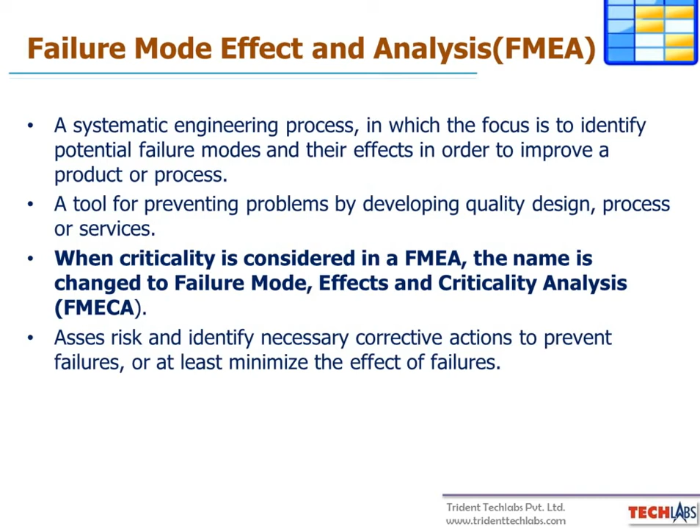So first of all, we want to see the history. What is the history for this FMEA analysis? In the mid-60s, in the aerospace industry, companies like Boeing or other aerospace companies, satellite companies, started using this FMEA analysis. Majorly because safety and risk is involved there, they will use this FMEA analysis. Majorly in India or all over the world, defense companies and aerospace companies are using this analysis.

So next industry is the chemical industry, because there also safety is required, risk also involved. In chemical companies there are a lot of processes. The chemical or any material has to undergo several processes. So how to improve, how to minimize the effects or failures, we can do through this methodology.

Afterwards, if you see the automotive industry, they adapted this FMEA technique. It's able to do a lot of improvements for them, because if you are doing any automobile company or electronics company, first they will invent one system. For example, if I take one missile, first they will design it to go and hit the target for 10 kilometers. The next system maybe it will go for more than 25 kilometers or something, because for the next generation or newer version, they want to overcome the drawbacks they faced in the previous system, to avoid those failures and improve their system quality. This method is very useful to do.

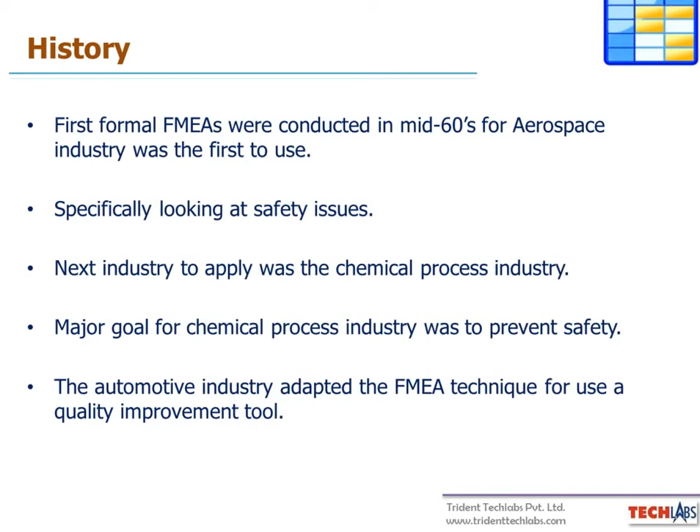So there are some simple terminologies in this approach: what is failure, what is the failure mode, what is the cause, and what is the effect. These kinds of terminologies are important. For example, I am saying the inability of the system is the failure.

So system means we can call it some PC, a personal computer, we can also call it a system. Whichever the designers are trying to make, that is the system. For example, if one system means there are so many other subsystems also will be there. If I am taking one computer as a system, inside that system there are so many subsystems, for example motherboard, hard disk, RAM - different types of subsystems are there. If anything is not working, we call it a failure.

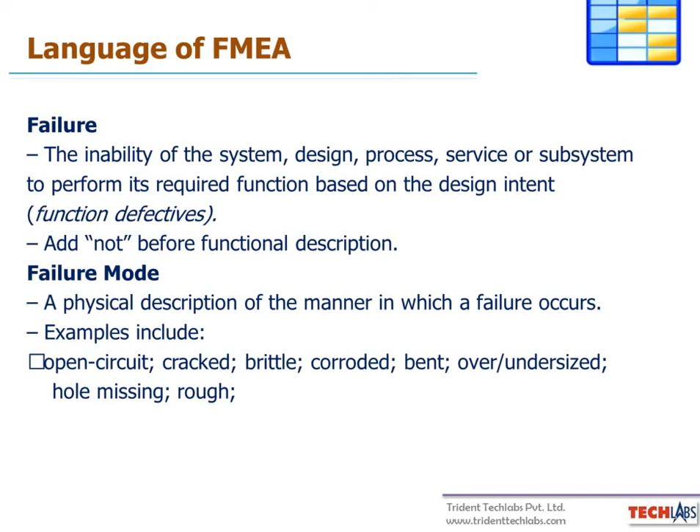So, failure mode - we should know what is the failure mode. Failure mode means a physical description of the manner in which a failure occurs. For example, if you take an electronic component like a resistor, there are two types of failures: one is open circuit, that is one type of failure, and short circuit, that is one more type of failure. So this is failure mode - open circuit failure mode or short circuit failure mode. Different types of failure modes are there. So that is one more terminology.

So what is the cause of failure? We should know which one is the cause of failure. So for some particular failure, what is the root cause, what is the origin of that particular failure? We should know the failure mechanism. If this resistor has failed, because of this resistor, power supply stops going to the system and the whole system is not performing - so this is root cause. We should know how the failure happens, why that particular item is not working, what is the reason for that particular failure. That is the root cause of the failure.

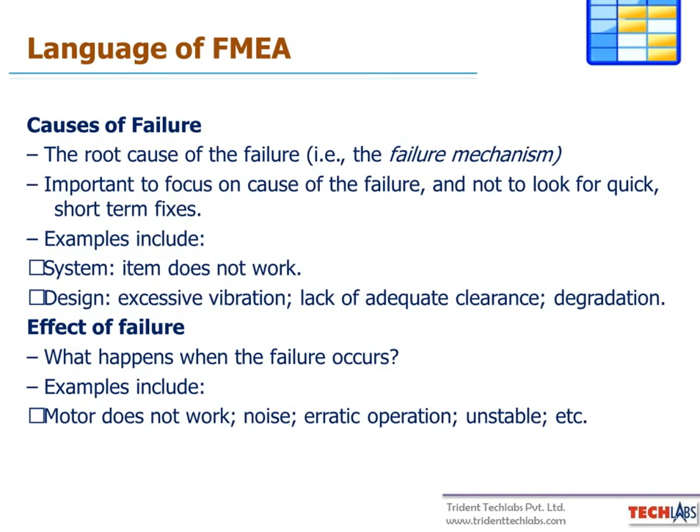Then effect - some failure has happened, then what will be the next effect? So if power supply has failed, my whole system is not working. That is the effect - my system is not working, or a particular motor, stepper motor, this is not working. Any kind of such effects we call effect of failure.

So what are the causes? Potential causes of failure - here are some more examples. Some poor soldering, if you are not doing it properly or at a particular heat, that is one kind of cause of failure. Or if you are over-stressing the components, if it is an electronic component, then we call that one cause of failure. So there are so many different causes for any failure.

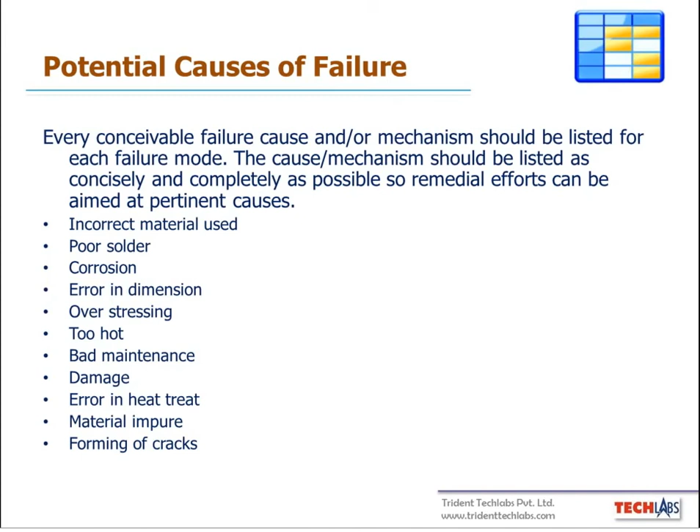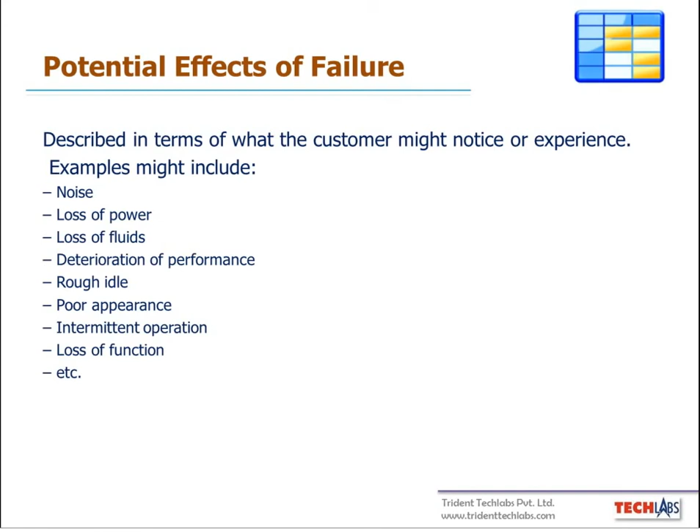So what about effects? Here are some more examples for the effects - loss of power, or any noise if it is coming, or loss of particular functionality. So there are so many different types of potential effects of failures. These are examples I have given - apart from that, so many other failures also exist in any system.

So there are levels. Item means any component - for example, a resistor or an integrated circuit like an IC or any processor. One item has different modes of failure - short circuit, open circuit, incorrect timing - different modes of failure exist. So for one mode of a particular failure, so many different causes also exist. One item having different types of modes, and one mode having different types of causes, and for each cause there will be some effect. So this is the level: item, under the item different modes, and under each mode different causes, and each and every cause having different effects.

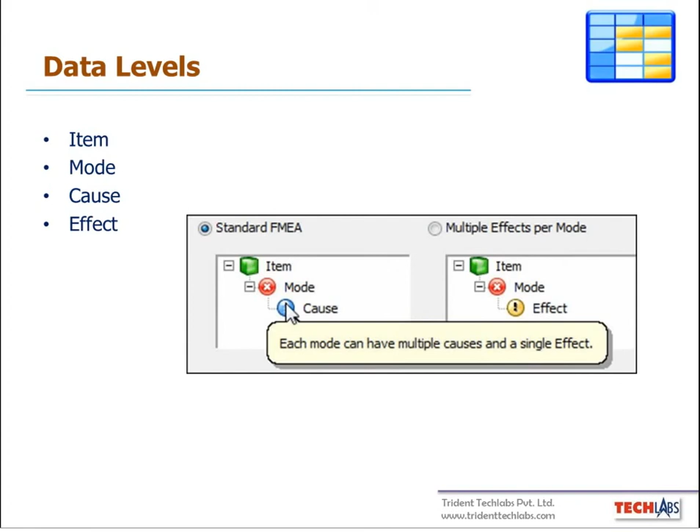So when doing any FMEA, you have to follow some standard, because already a path is there, already a road is there, so we have to follow that particular path. If it is an aerospace or defense project, you should use the MIL standard 1629. If it is an automotive industry, the AIAG method is there. If you are doing any non-automobile application, the SAE method is there. So different types of standards exist because the products are different, the end products are different - different products having different standards.

So first we will see the MIL standard - MIL standard 1629. This standard is given by the Department of Defense, US. They have made this standard. So since a pre-made standard already exists, it is better to follow that standard. And so many software tools have also incorporated this standard into their software, so the methodology and approach will be much easier to do this analysis.

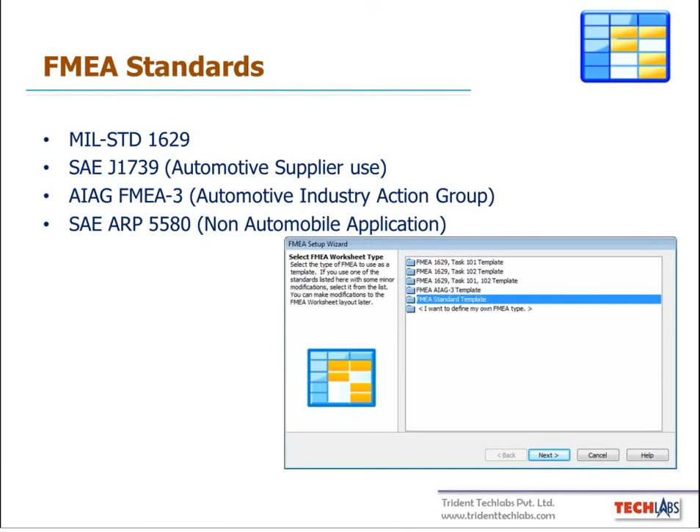In MIL standard 1629, there are different types of tasks. Task 101 is the failure mode FMEA task, 102 is the criticality analysis, 103 is for FMEA maintainability information, and 104 is damage mode and effect analysis - because each system has to undergo certain analysis. So for example, task 101 and 102 are the major tasks followed in this FMEA analysis.

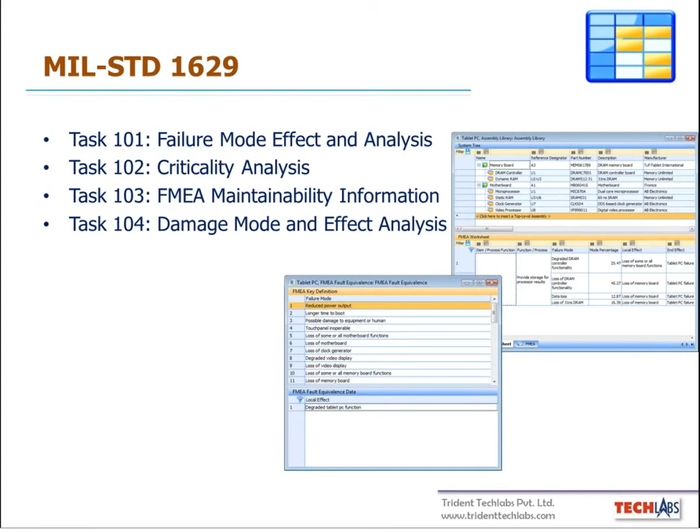There are different types of FMEAs. Three types are there: process FMEA, functional FMEA, and component level FMEA.

Process FMEA means if you are doing any electronic system, inside that system there are a lot of different components, PCBs are there. In that PCB, varieties of processors like processing unit, A to D converter, so many components are there. Each and every component we should handle in a different manner. For example, if you are making a PCB assembly, and you touch a processor with your bare hand, then there is a failure or some effects on the particular component. So how to handle those particular components, processors, how to handle them?

So like electronic, electrostatic protection, anything you have to use. These kind of guidelines you have to give to the assembly people, who are doing the PCB assembly. If they don't properly handle those particular components, it will affect the performance of the component, then it will affect the PCB level, then the whole system level. So these kind of processing details, you have to give as guidelines to whoever is handling those components. That is process FMEA.

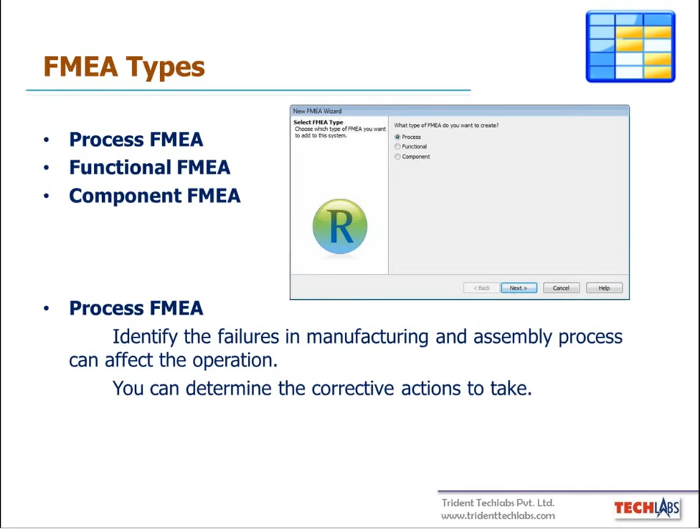Now if I say functional FMEA means, what are the functional level failures? One system is there, for example a laptop, what type of functional failures will come. For example, if the mouse is not working, that is one type of functional problem. If your motherboard is not working or your processor is not working, some particular functionality level, that is functional FMEA.

Functionality level means my display is not working, my keyboard is not operating, or my particular action is not taking place. My LED is not glowing, power LED is not glowing. These are different types of functional FMEA.

The same point of view, if I say component level FMEA. Component level FMEA is single point failure. My processor is not working, my LED is not glowing, this is a single point failure. If that particular component is not working, my whole system may not work, or my partial system may not work. These kind of problems will come. That is component level FMEA.

So we should know where we should use component level FMEA and where functional FMEA. For example, my system may be very small or very huge. For a small system, we should go with component level FMEA. If my system is very huge, more than 500 or 550 PCBs in one particular system, then there are lakhs of components. I can't speak at the component level, so I can speak only at the functional level, how my top level system is getting affected based on particular components or particular functional activity.

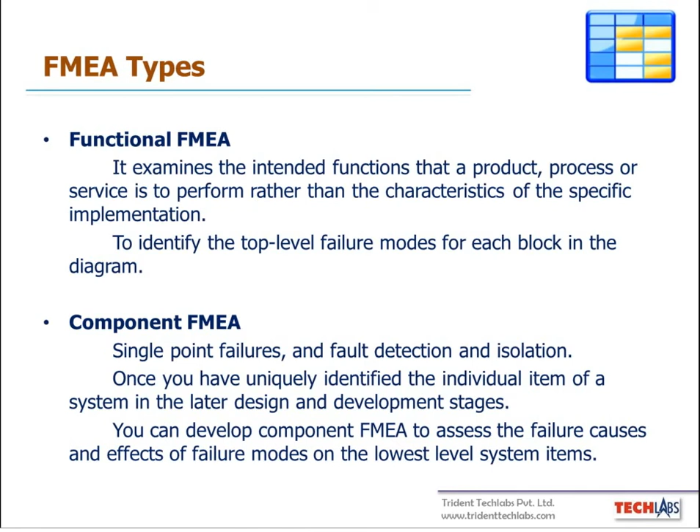More severity, the critical level is there, marginal level failure is there, then minor failure is there. Minor failure means we are doing some maintenance activity that is not in the regular plan, unconditional maintenance but not planned maintenance, that is minor level. Marginal level means some particular functionality only is not working. Critical level means some particular subsystem or part of the system is not functioning. So the designer should know which severity level this particular failure is.

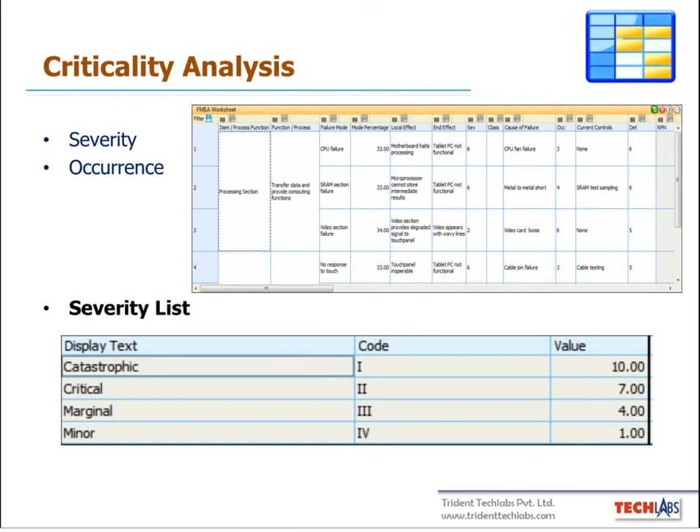So occurrence: what type of occurrence is happening. For example, it is happening very frequently, or it is a reasonable failure, or it is happening occasionally, or it is a remote-level failure, or extremely unlikely, where we never expect this kind of particular failure to come. So those kinds of failures, this is the occurrence list.

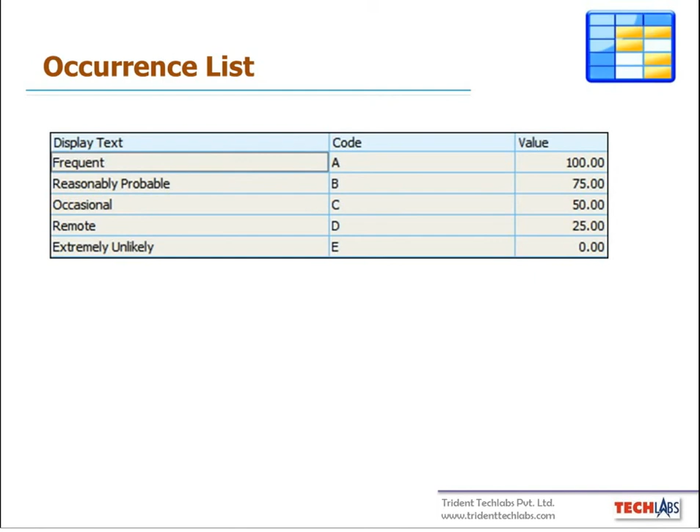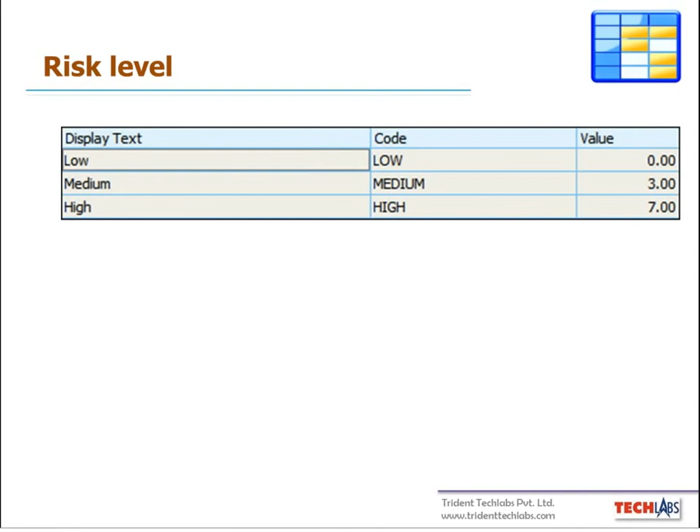So based upon the severity and the occurrence, we will decide the risk level: whether my system is at a high level risk, a low level risk, or a medium level risk. From that, we will do the criticality matrix. Based on the severity and occurrence, whether my system has a low level problem or a high level problem, we can define through the criticality matrix.

Because here, for each one, we have different types of values, and some values we have mentioned. According to these values, by multiplying these two, we can define the risk level, which risk level my system is in. That we can define through this criticality matrix. This is the FMEA MIL standard. Based on MIL standard 1629 we are doing this.

And here one more important thing is there: FMD. FMD 97 means failure mode mechanism distribution. FMD means that each and every component has different types of failures. Because a capacitor will have some typical types of failures only. Or a microprocessor, apart from some 5 to 6 failure modes, there won't be any other failure modes.

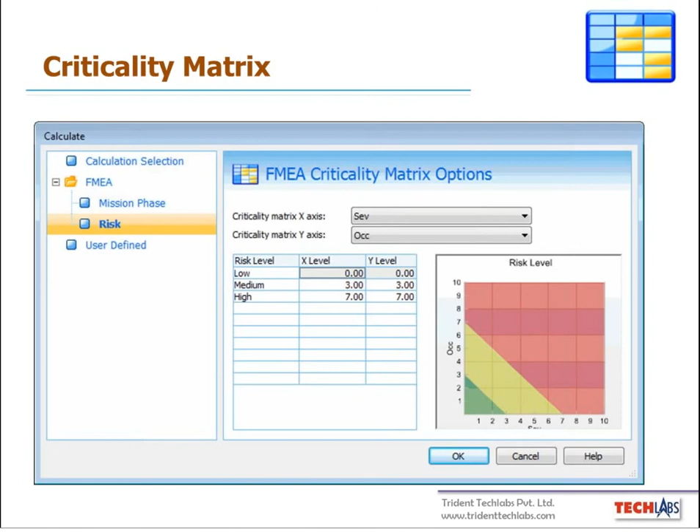So these kinds of failure modes for each and every component, diode, transistor, processor, not only electronic components but mechanical components also, are readily available. Directly for this failure mode, what is the chance of system failure, that we can define. So this is the qualitative analysis.

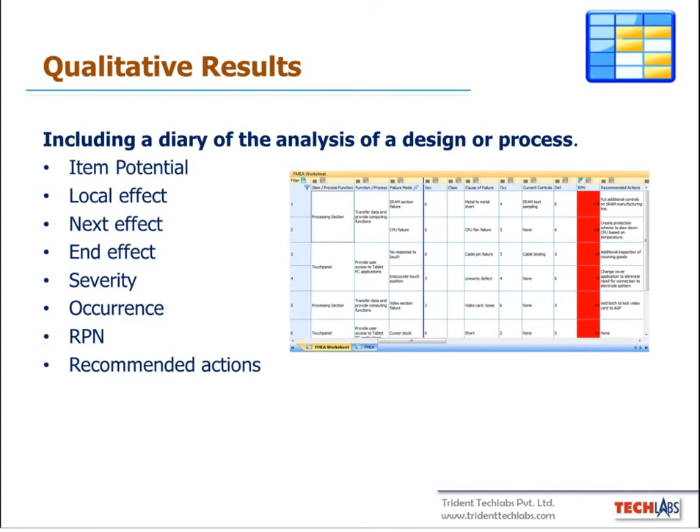Then the next method, which the automotive industry follows, is the RPN method. RPN is risk priority number. Based on what will be the local effect, the next effect, the end effect, and the severity and occurrence, we will define the RPN number. This method is the AIAG method, AIAG potential failure mode and effects analysis. This is for the automotive industry, and we can use it for electronics also.

We can use it, but whenever we do any FMEA analysis, the customer or the supplier who wants this FMEA will mention according to which standard you should do the FMEA analysis. So severity means there are different types of severities, each with a different ranking. Severity 10 means dangerously high: if it will injure your customer or a company employee, or cause system failure.

So there are different types of severity levels mentioned here. For example: extremely high, very high, moderate, low, very low, minor, very minor. From this ranking level, the designer can easily define how this particular component or particular failure is affecting the system. He can define it easily based on these severity rankings.

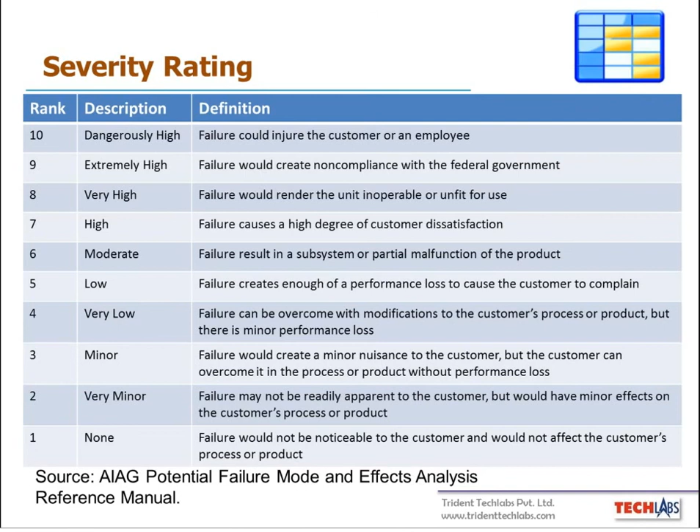The same way, occurrence is also there. Probability of failure very high means failure is almost inevitable. You can't identify what type of failure it is, so we give it the highest rank. Like this, high, moderate, low, very low are there. And possible failure rates. We should know what failure rate is. Failure rate basically means the frequency of failure.

A simple example: if you are buying any TV, like an LED TV or LCD TV, we will ask the warranty period, how long my system will work. They will give some 1 year or 2 year warranty. Your system may work more than 1 or 2 years, but at minimum the system will never fail within this particular period of time. So based on this failure rate only, they define the warranty period.

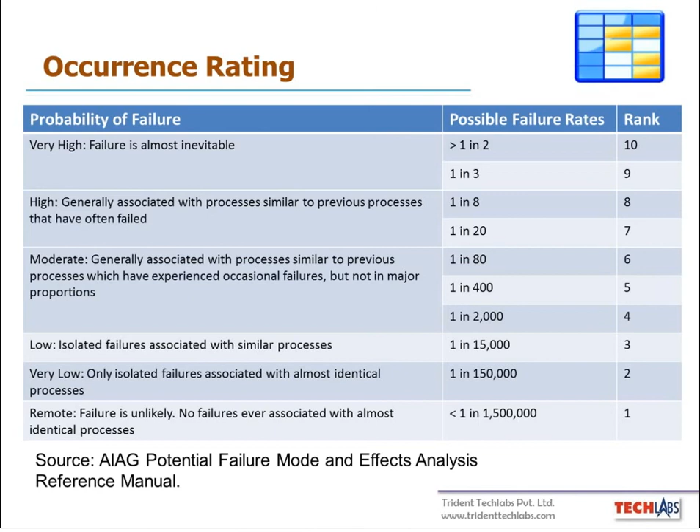So failure rate basically means, for a million hours, how many hours my system will work. So the lifetime of my system we can define. That is the failure rate, basically the frequency of failures, how frequently my system is going to fail. At minimum it will work for this many years. Only after that does the system get degraded, and then it starts giving some problems, or particular component failures will happen in your system or product.

So next one is the detection. What is meant by detection? Detection is an assessment of the ability of the proposed control to identify the potential cause, any design weakness, before it is released to production. Because at the design level itself we should define this. We are detecting the design weakness.

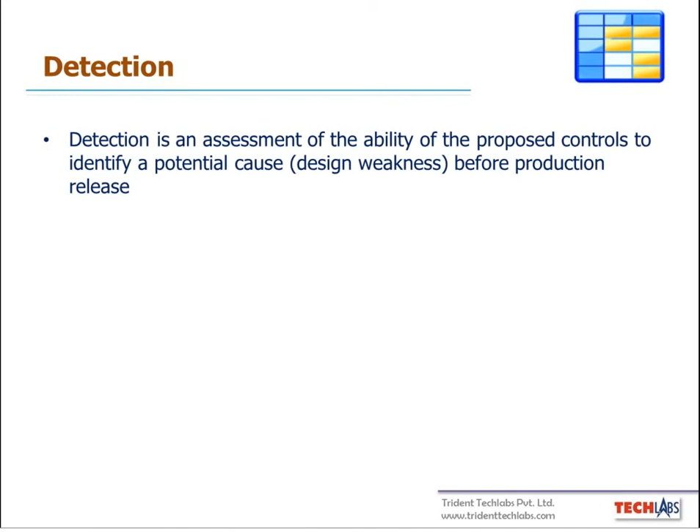Because before reaching the customer, before the product reaches the market, I should reduce the types of failures. In the design stage itself, I should reduce the design weakness. So what are the failures? I should reduce them. For detection also some ranking is there.

Almost impossible: you couldn't detect this kind of particular problem. I don't know how the system is failing, what type of failure mechanism happened, and how to identify it. For that kind of failure, we call the detection ranking 10. Almost impossible to detect that particular failure. Then very low, low, moderately high, very high. For that also a detection method is there.

And one more thing here, for example, if you take one simple system, a keyboard, there is a method to detect whether caps lock is on or off. If the caps lock LED is glowing, it means it is on. Similarly, whether the clock signal for my system is coming, whether my power is switched on, whether my power is the exact power my system needs, for these kinds of details some identification method, some detection method is there.

So for example, caps lock means if it is on, that LED will glow. In a very huge system, I should not have to probe and test whether this processor is working, my clock signal is coming, or my system is synchronous or not. A detection method should be there. If this LED is glowing, then I should know my system is synchronized and has started working, and my clock signal is working fine.

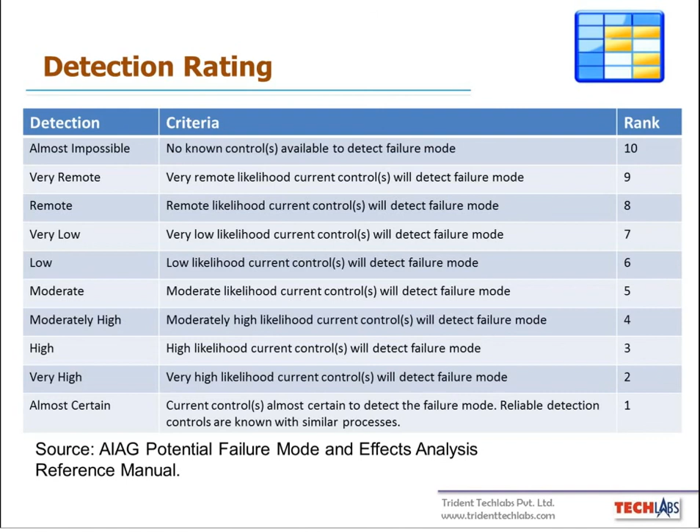So what is the risk priority number? It is the product of severity, occurrence, and detection. For each value, the highest value is 10 and the lowest value is 1. You should not give 0. If you multiply these 3 values, whichever gives the highest value is the higher priority, and you should do the FMEA analysis for that particular component.

One more thing, whichever is the most severe, you have to give more importance to that particular severity. If the severity ranking is higher, we should give more importance to that particular component. So multiplying these 3, whichever gives the highest value, you should take corrective action. And you should know what corrective action is.

For example, if you are using any system with a battery, and that battery is expired, its charge is down, or its capacity is weak, and you simply replace it with another battery, that is not the corrective action. Corrective action means you have to change the design, a circuit-level design change; if you are doing that, that is the corrective action.

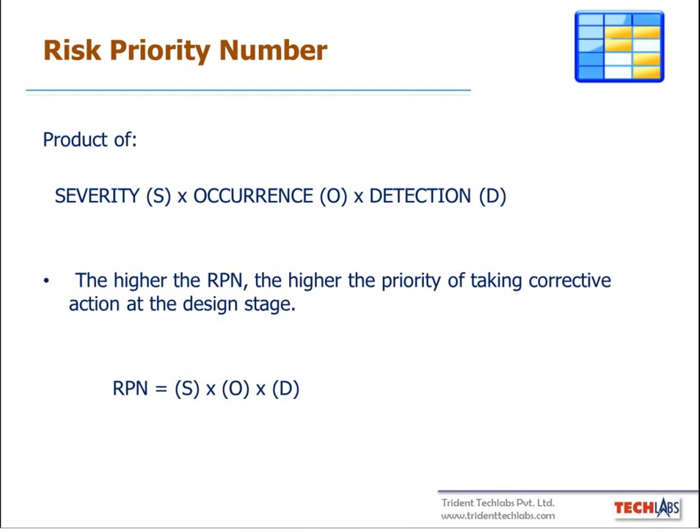So corrective action, what corrective action you are giving? No, that is the recommended action. So what we should do is, we should recommend some actions. This is because in FMEA analysis, the customer complaints, the quality division person, the testing person, and the designer, everybody has to be involved in this FMEA action.

Because there will be a lot of suggestions. From that you can find out what is the corrective action for this particular problem. So you should take some corrective action. After that corrective action, we can do design changes in your system, and you have to freeze the circuit. So after that there should not be any change in the design when the product is reaching the customer.

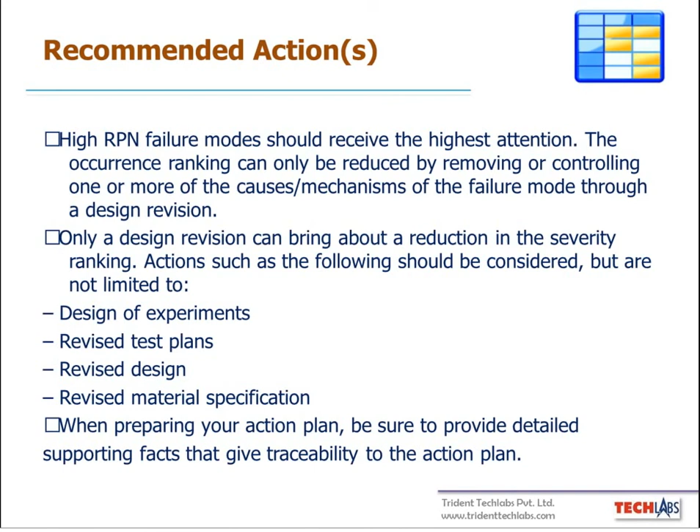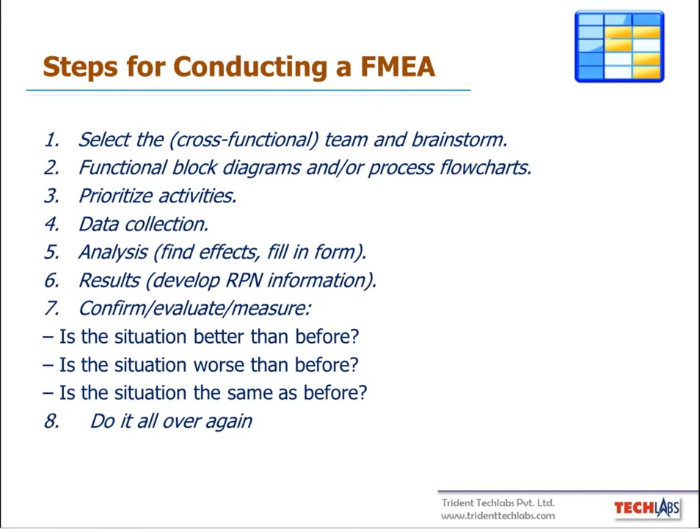Now my processor won't heat. So one specific fan for the CPU, then one heat sink for the processor, and if my system is still failing, a small fan for that processor. Like this, if you keep on doing the FMEA action, then only you can reduce system failure, and safety will be more. This is the concept of FMEA. We can do this in the reliability software Relex, now called Windchill Quality Solutions. This is one of the modules. Any questions regarding FMEA, you can ask me.